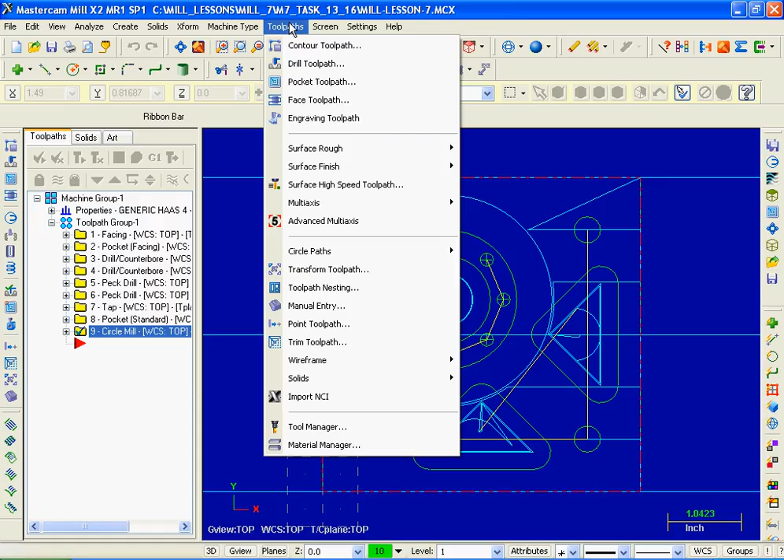So let's get busy. Going to move up into toolpaths, and right at the very top of the list here, contour toolpath. So on the left we have the chaining dialog box with chain set, and on the graphic screen our prompt, select contour chain 1. So I'm going to move on down and click on this lower line for the slot. Now the arrow is pointing in the correct direction to climb mill this slot, so that's good. So we're done here. I'm going to click on OK.

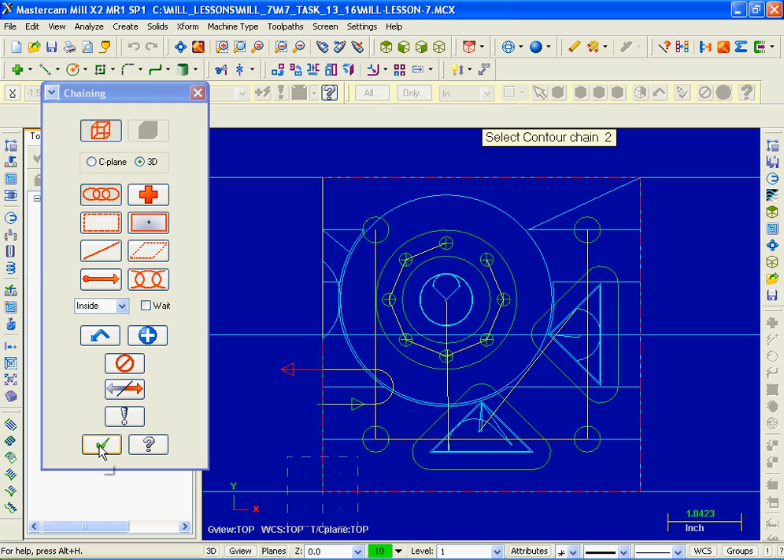Now we need to select an end mill. I'm going to click on Select Library Tool, and we need a 3/8 diameter flat end mill. So there it is. I'm going to select it. We're done here. I'm going to pick OK. Feed rate, I'm going to change that to 8 inches per minute. The plunge rate, likewise 8 inches.

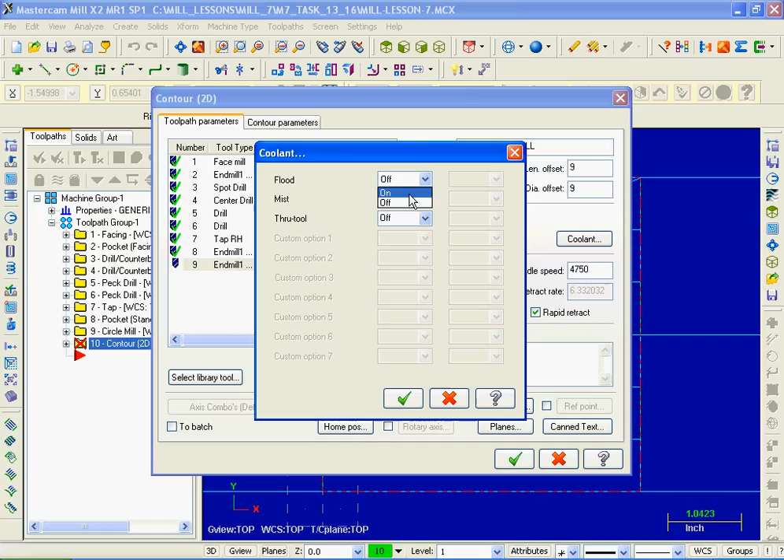For the spindle speed, 4750, and I'm going to check mark rapid retract. Also going to turn the coolant on. I'm going to click on the coolant button, open up the drop down for flood, and turn it on. We're done here. OK.

Next up, let's move over to the contour parameters page. I'm going to check mark multi-passes, depth of cuts, breakthrough, and lead in, lead out. Now let's check our depths. Clearance, we got that at absolute, set to 2 inch. That's good. I'm going to check mark use clearance only at the start and end of operation. Our retract, absolute 0.6. That's good.

Feed plane, likewise 0.6. Top of stock is an absolute. I'm going to change it to 0.325. And for the depth, I'm going to change that to 0. This slots right through the part. So everything looks good here. I'm going to click in the lead in, lead out button.

And starting at the top, I'm going to deactivate enter exit at midpoint. I'm going to leave the check mark against gouge check entry exit motion. And I'm also going to uncheck the entry lead in, lead out, and also just slide over to the right. I'm going to uncheck the exit as well.

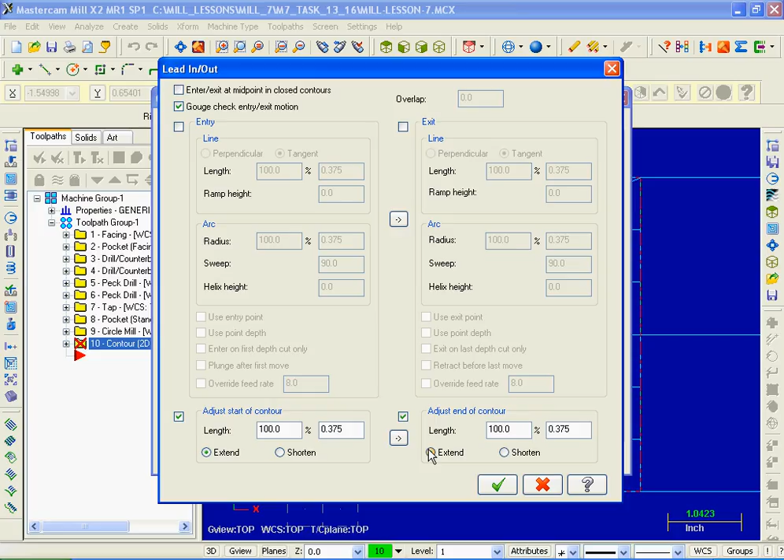Down at the bottom, I'm going to check mark adjust start of contour. I'm going to extend it, and the length, I'm going to change that to 100%. Sliding over to the right, I'm going to adjust the end of contour, so I'm going to activate, and likewise for the length, I'm going to put in 100% and check extend. So everything looks good here. I'm going to click on OK.

Next up, we're going to move into multi-passes. So I'm going to click on the multi-passes button. I'm going to leave the number set to 1 for roughing passes. The spacing, I'm going to set that to 0. Down below in the finish passes, for the number, I'm going to change that to 1. But for the spacing, I'm going to change that to 10 thou, 0.01. One last thing, machine finish passes at final depth and check mark keep tool down. So we're good here. I'm going to click on OK.

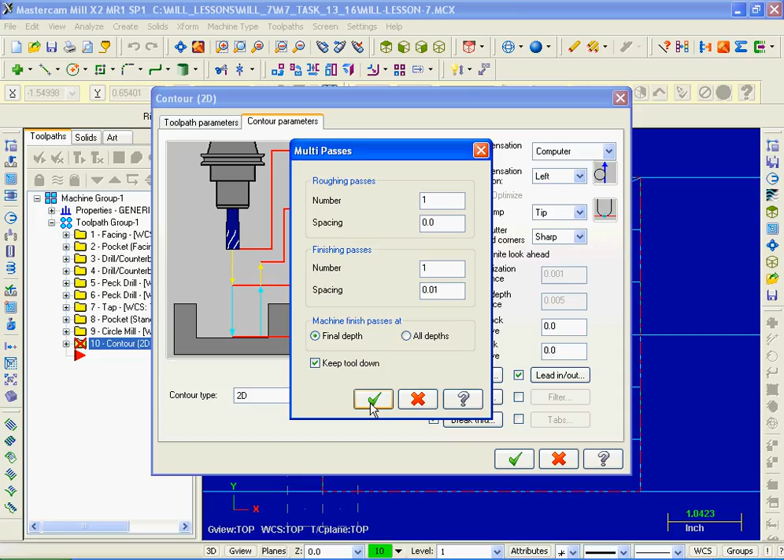Next up, depth of cuts. For the maximum rough step, I'm going to input 0.125. Number of finish cuts, going to leave that at 0. Finish step, going to change that to 0. Keep tool down, I'm going to activate. Everything looks good here, so we're done. Green check mark for OK.

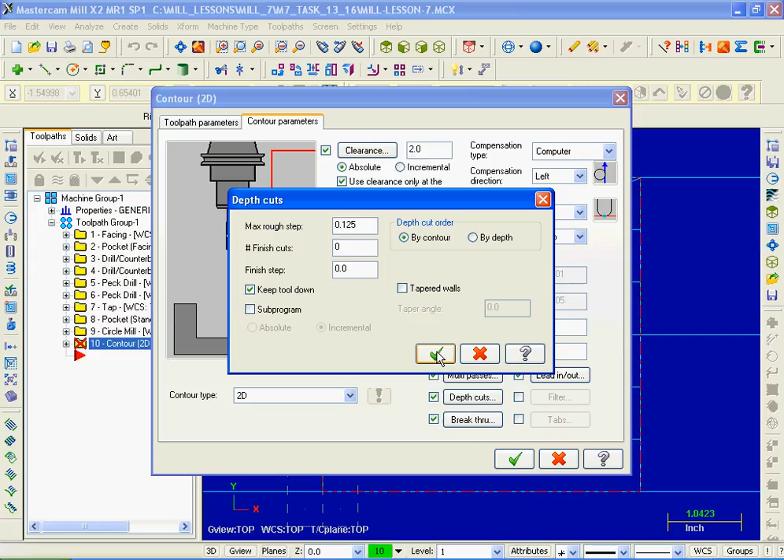Next up, breakthrough. I'm going to click on the breakthrough button. Now the breakthrough amount, I'm going to change that to 10 thou, 0.01. We're done. I'm going to click on OK. Now, one more time, OK.

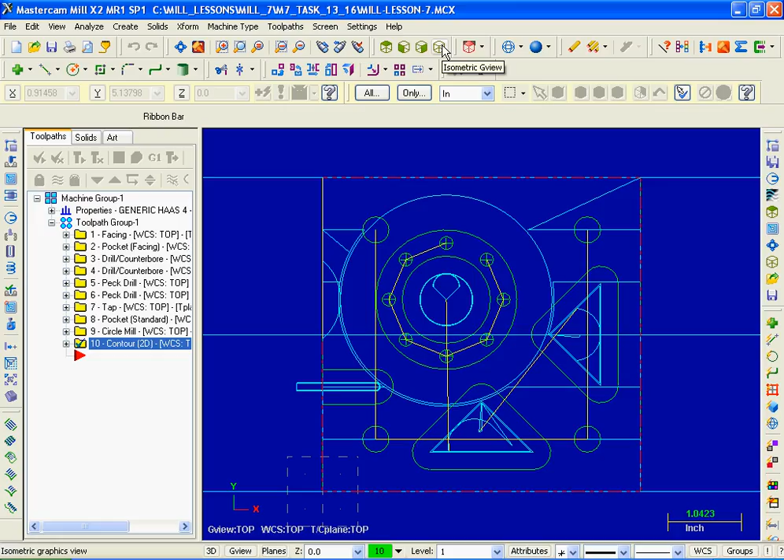Now let's verify the completed part. I'm going to move up and click on isometric. I'm going to do a screen fit. Over on the left in the Toolpath Manager, I'm going to click on Select All Operations and then click on the Verify Selected Operations. Speed is at midway. I've got the Simulate tool and holder. Now let's click the machine button.

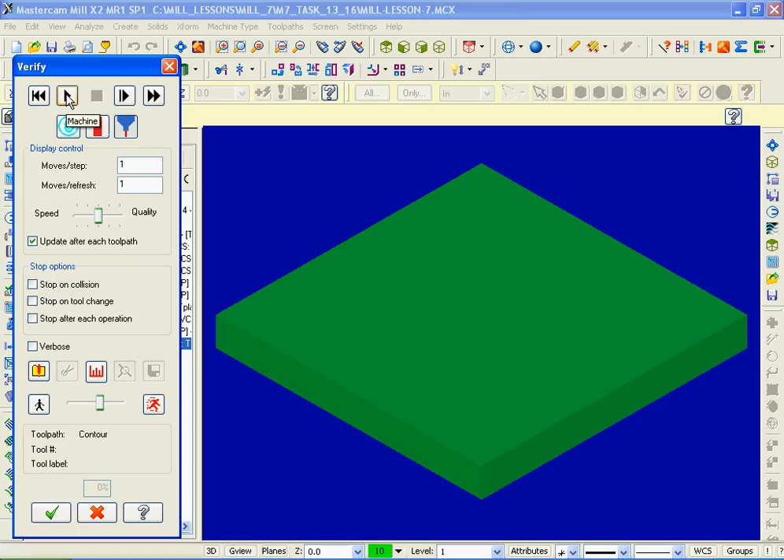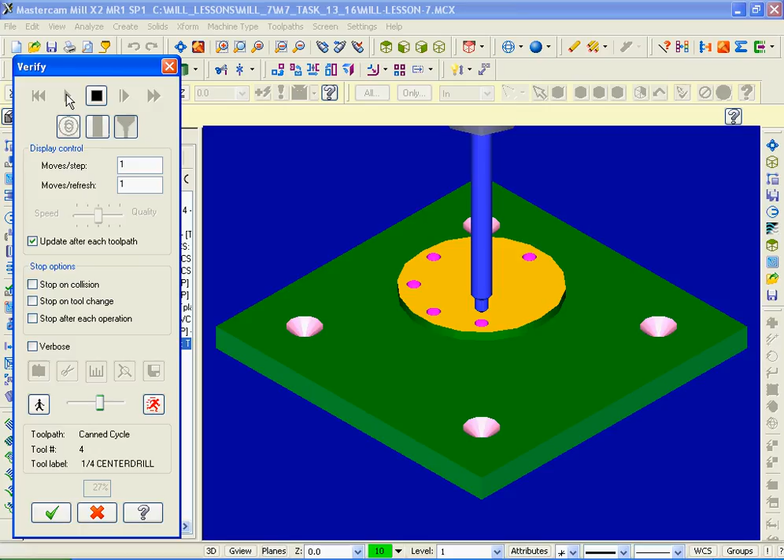There's our spot drilling operation. Next up is the center drill, drilling the bolt hole circle. Following this, 3/16 drill, drilling right through the part. Next up is our tap drill operation, followed by the tapping operation.

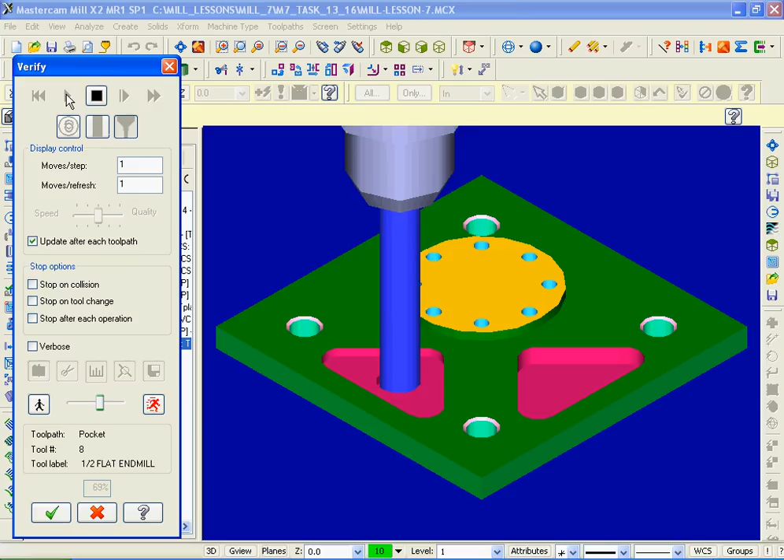Now we're machining out the triangular shaped pockets. There's the first one, second one. And then the slot we just completed. A thing of beauty. Looks good. I'm going to pick OK here.

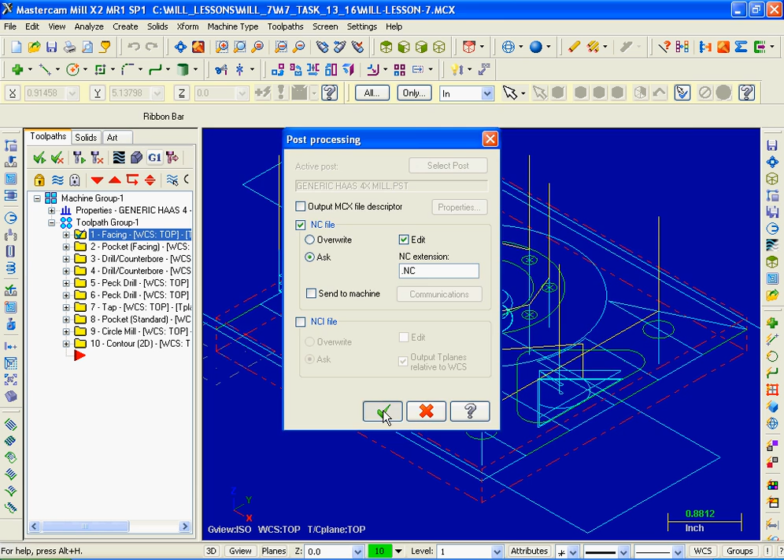I'm just going to move up and click on the icon for save. Let's post and create the CNC code file. Everything is selected. I'm going to click on Post Selected Operations. I'm going to click the green check mark here. I'm going to accept this name, Mill Lesson 7, hit save.

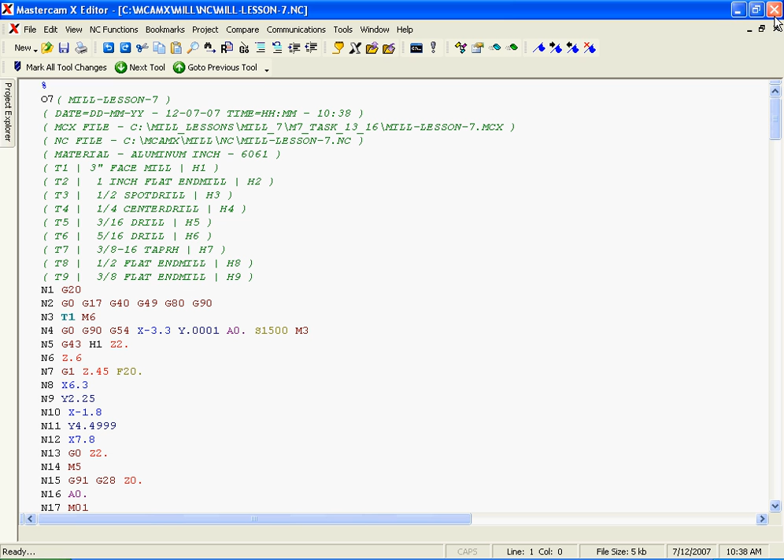And there's all our G codes and X and Y coordinates. Looks great. I'm done. I'm going to pick up in the right corner there the X. Now this completes Mill Lesson 7 and this video.